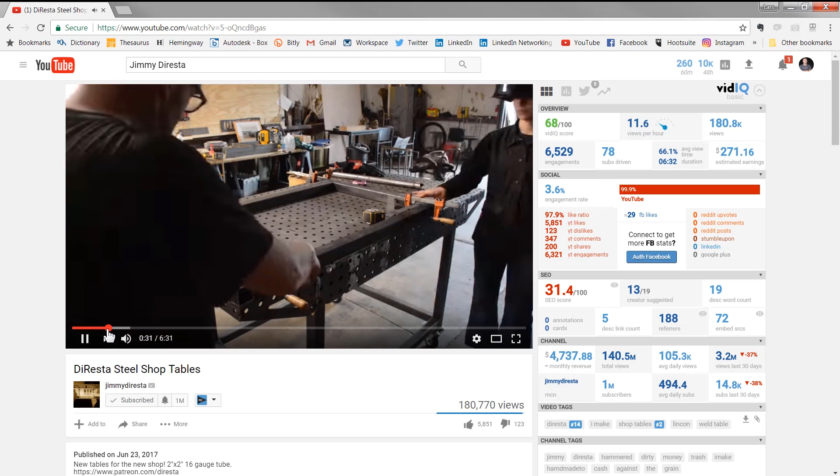Let's get to the modeling. So I'm going to do this with a couple of different techniques. Let's start out here by creating a new component, as this will be an assembly. So I'm going to click New Component, and I'm going to go ahead here and just name this one right off the bat. So Square Tubing.

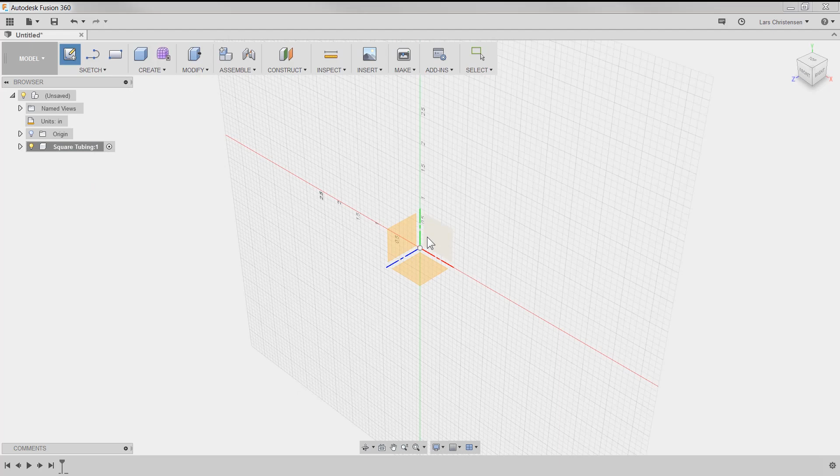And let's go in and start our first sketch. It doesn't matter what plane I'm sketching on. I'm going to hit the S key on my keyboard for my sketch toolbar, and I have the center rectangle right here. I'm going to go ahead and sketch up something that is 3 by 3 inches here. And then I'm going to hit O for offset. And I'm just going to offset this edge in here minus 0.25.

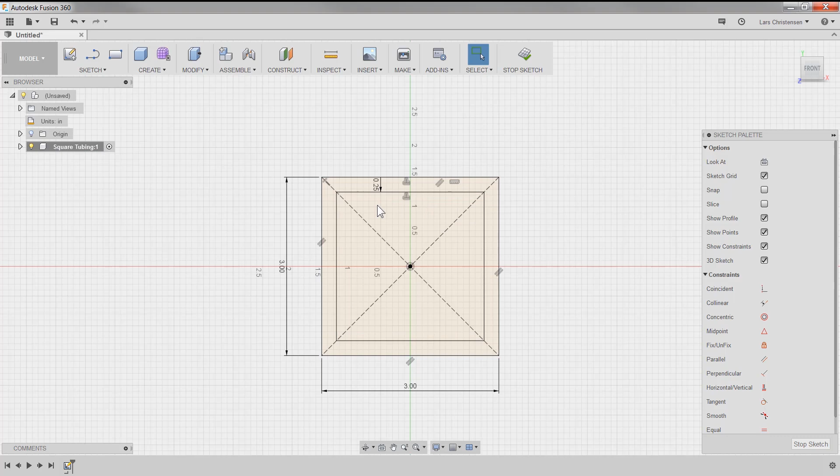Now that's really all I'm going to do with this square tubing within this sketch. I'm going to hit Q so we can do our press pull. And I'm going to make this one 8 feet long. So I'm actually going to type in 8 and then FT for feet. See that right inside of the distance dialog there. Hit OK. And we now have an 8 feet piece of square tubing.

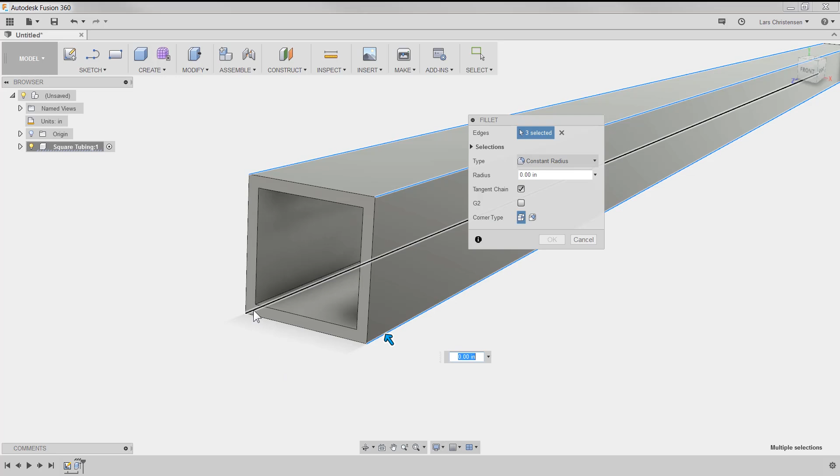Now there's going to be a couple of fillets on it here. So I'm going to hit F for fillet. And I'm just going to start out by selecting the outside edges, and you don't have to spin around to select the different edges. You can actually select right through here. And I'm going to make this 0.25, and then I'm going to do the same thing for the inside.

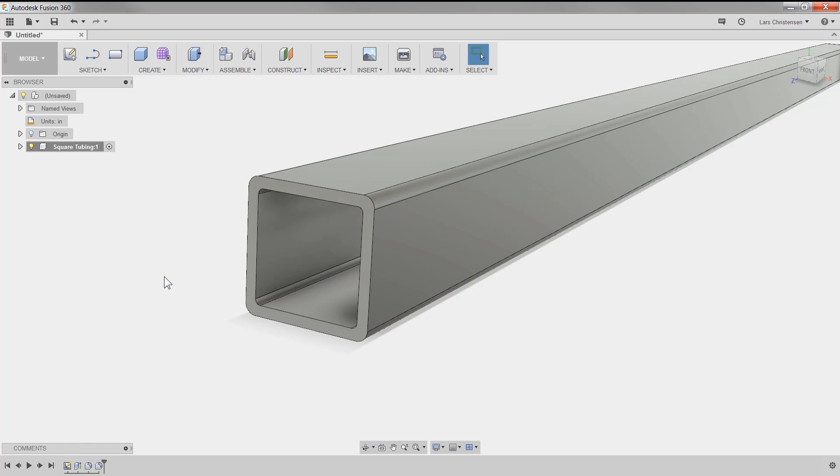So I'm going to right click and hit repeat fillet. That's just one way to get to a repeat command. And then I'm going to select the inside edges right here. And again, you can select right through the solids here. And I'm going to make it 0.15. Just like that. So this is my first piece of tubing. So this is a 3 by 3 by 8.

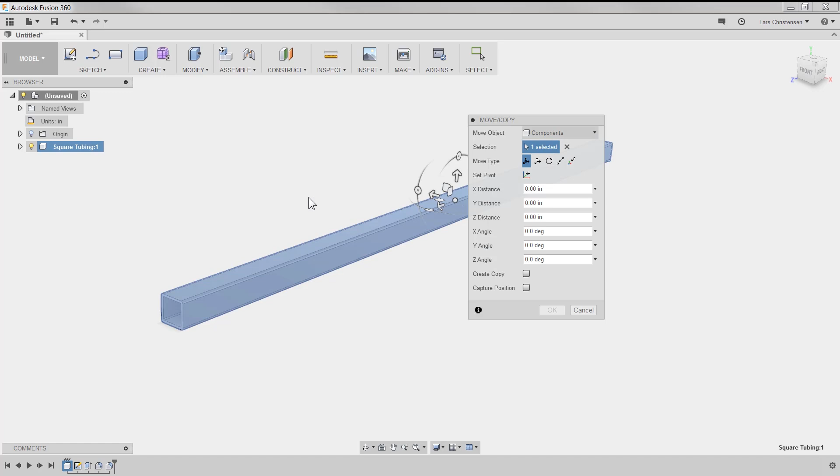Now I'm going to go up and make my top assembly here active. And then I'm going to do a right click and do a move copy command. Now in here, I can select different things. I'm going to select the component, right on our component here. And then I'm going to create a copy of that component.

That's going to create a second component over here in the tree. And I can now just drag that this way here. And I'm going to make the table 4 feet wide and hit enter. So now what we have here is 2 square tubings, but they are copies of one another.

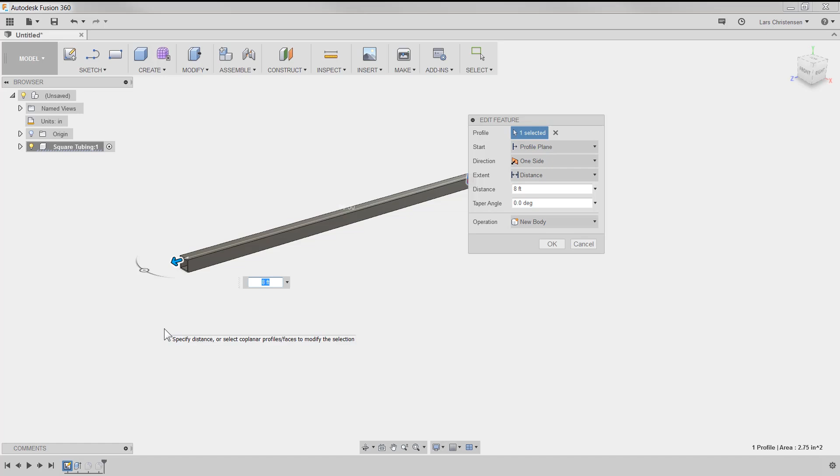That means that if I go into our first tubing, and if I, for example, change the extrusion from 8 to 6 feet, you will see that it's going to be reflected on both of them. This is now a copy of this one. But it's fine. It's just good to know that that is how the move copy tool works. Let's go back and make that one back to 8 again.

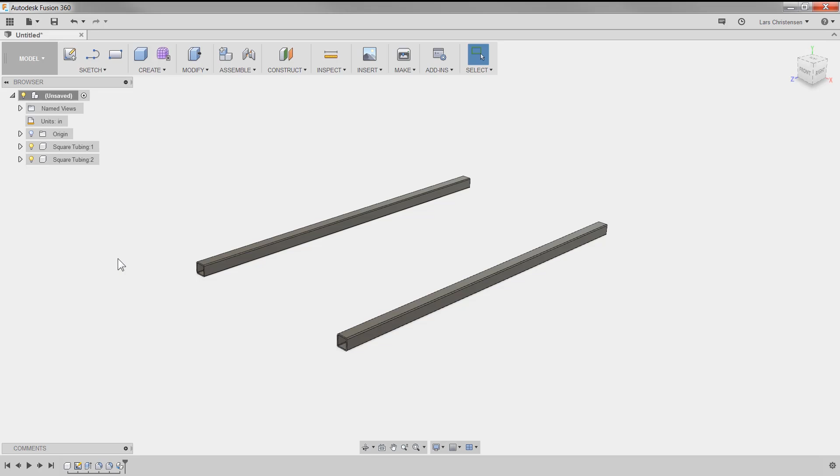Now we're going to go ahead and make the end piece here. But the end piece, of course, is going to be shorter than the original 8. So now we actually need to break a copy to be able to do that. And the way we can do that is if I go up on our first square tubing again, and I right click, I can do a copy.

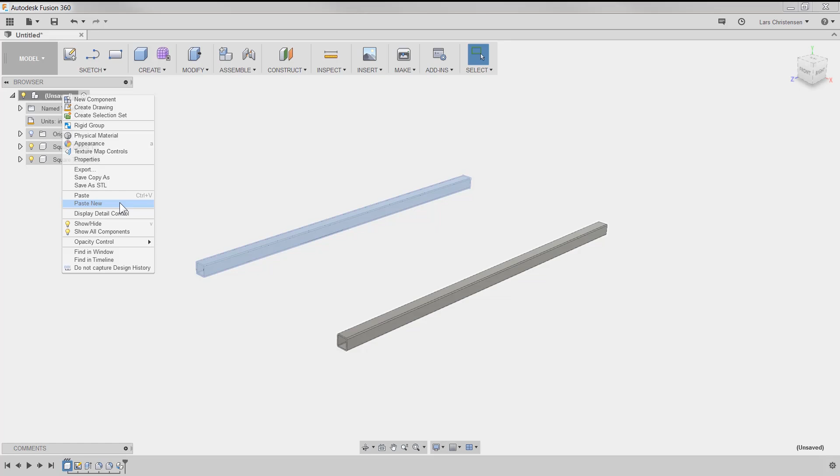And then by having the top component here active, and if I right click on that now, I can either do a paste, that will just be a copy like the one we just created for the second half of the length. But if I do a paste new, this will actually be a broken copy. So they are not associated, they're not linked together. So I'm going to click on that.

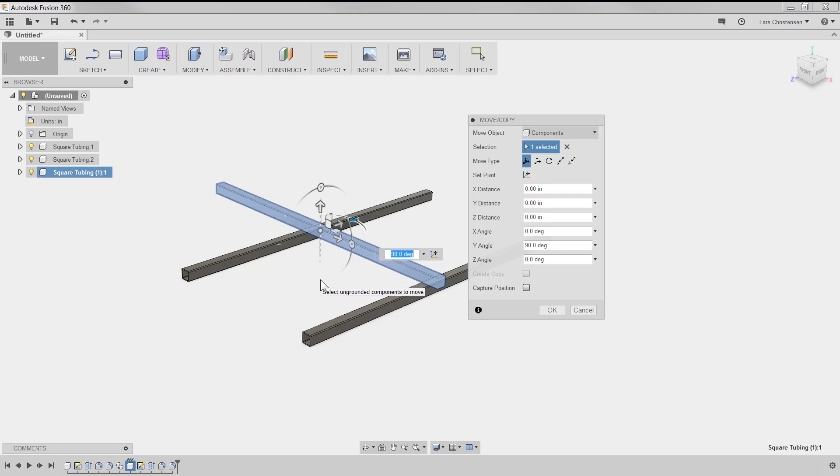And you will actually see that I get what was called kind of like a free move as soon as I do that, as soon as I place that here. And what I'm going to do is I'm actually going to rotate it 90 degrees. I'm just going to hit the little handle here, rotate it 90 degrees. And then I'm going to go over and select point to point.

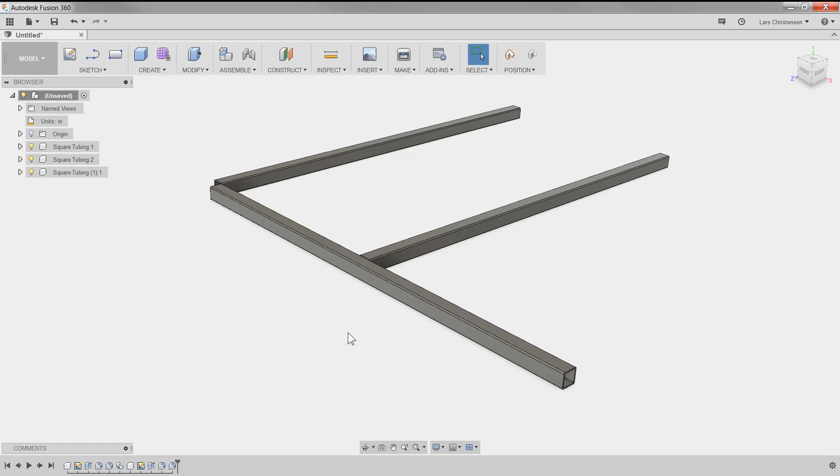I can actually go over on our edge here and I can select a point that I can now align this component up with right there. And now when I hit OK, you will see that I got now the third component in here that is not linked, but of course it is still too long. So I can actually go in and activate that, and I can now make that shorter, and that will be independent from the other one.

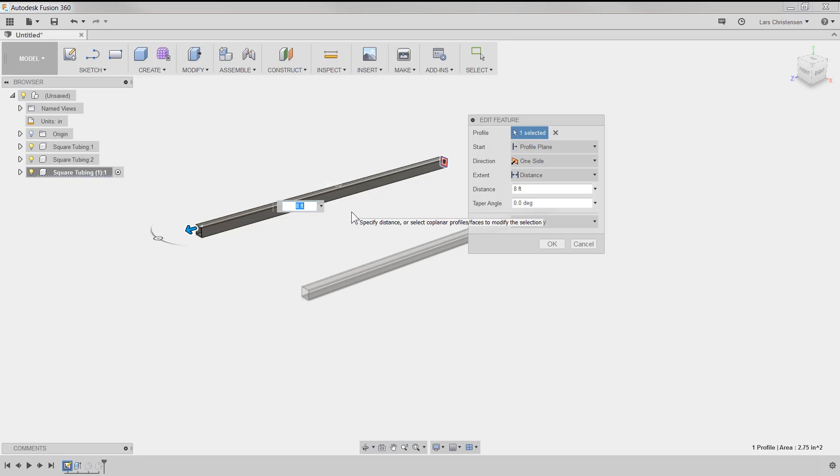Now, one thing you will just notice here when I make it shorter is that it actually on the screen jumps back to where it originally was when this happened. So that's one of the things to be aware of, that because we're going back in history, that will also affect that. I'm going to make it 45 inches long and hit OK. And if I go up and make our main assembly active, you will now see that I got that to the right length.

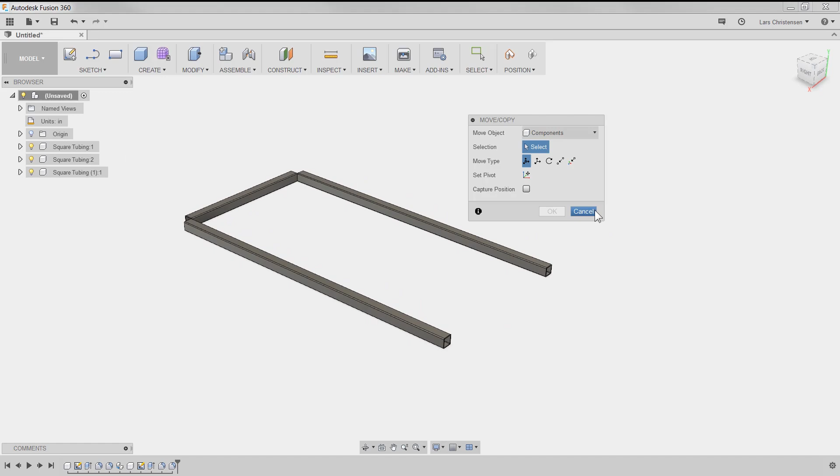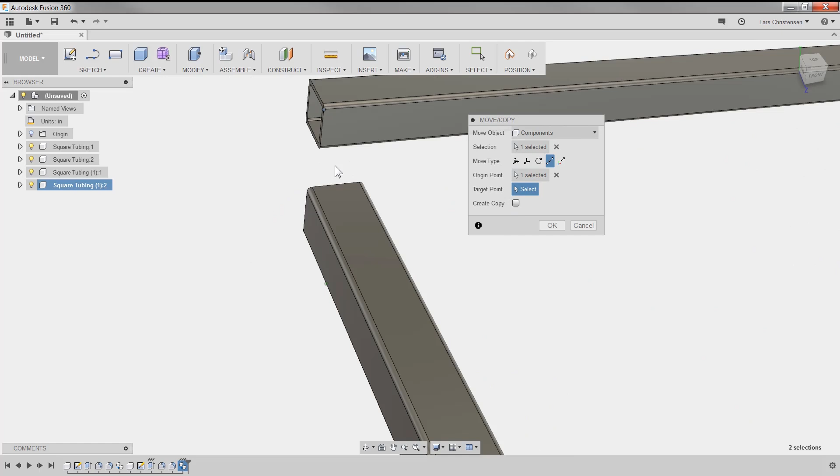Now I can go ahead and make a copy of this one. So I can do what we did before. I can right click and with this component selected, I can select create a copy, because that is what this is going to be. And sometimes I actually like to drag it out a little bit first before I go back into the point to point. It just gives me a chance to make sure that I select the copy, and I can select a point here and a point here. And when I hit OK, we now have the fourth component in here.

So as this is created right here, this is our original one, and this was a copy of that one. Then we broke by doing a paste new the second one that we now have made a copy of there. What that means is that if we ever change the length of the first component, then everything will update along with it. This is one of the nice things about parametric design.

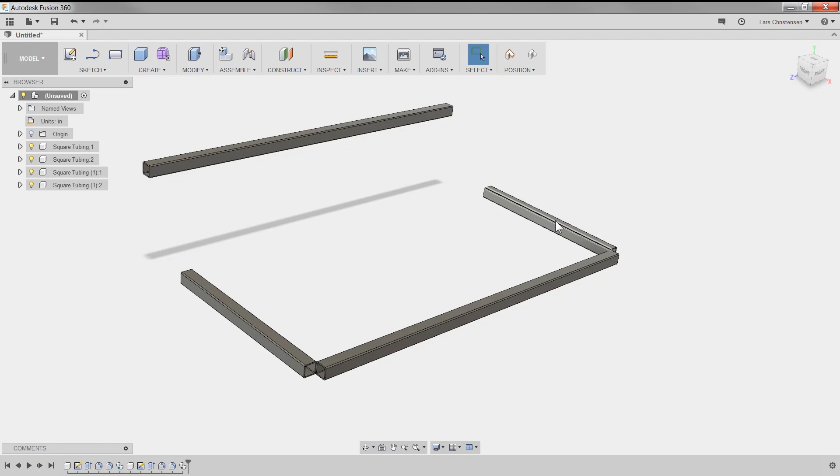Now with this put together here, one of the things to be aware of is that right now everything in here actually still floats around. Each component has not been tied down to one another. Let me just hit Ctrl+Z to go back to where we were. So in a CAD system like Fusion 360, we now need to, like Jimmy Diresta does, weld these together. So the first thing we got to do is nail one of them into space. We're going to go up here on the first one, right click, and I'm going to ground it. You get a little thumbtack. That means that this component is grounded in space.

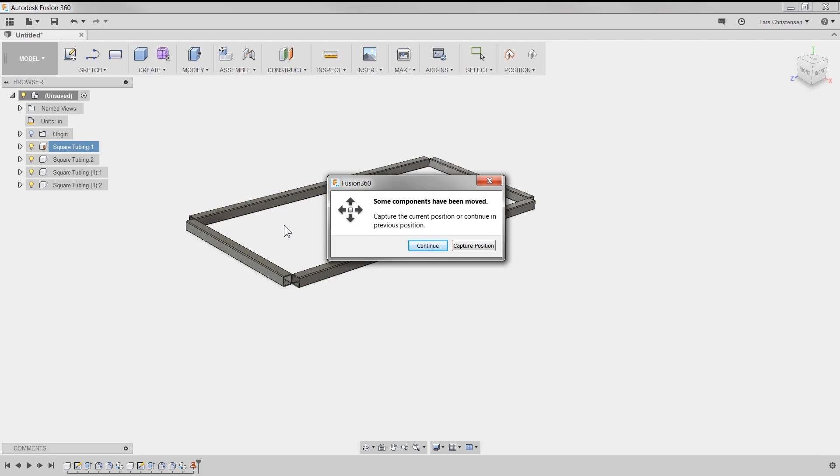And then I actually have a very nice function in here called rigid group. And I can now go in and select the remaining components in here, hit OK, and now everything is not moving anymore. Everything is in place.

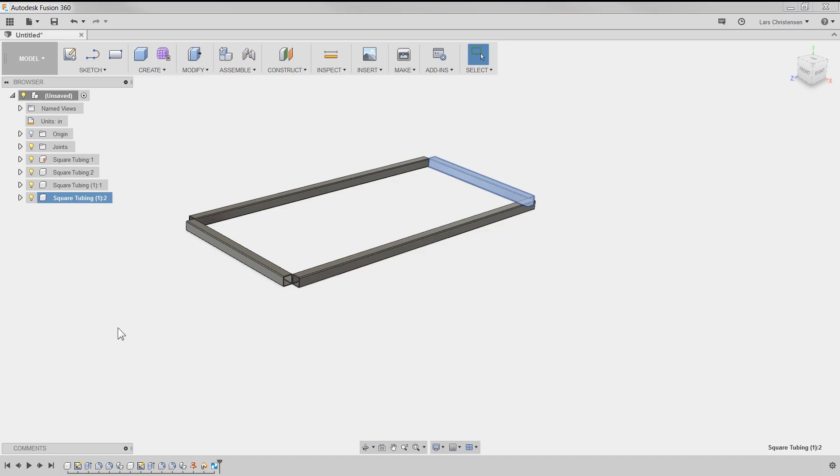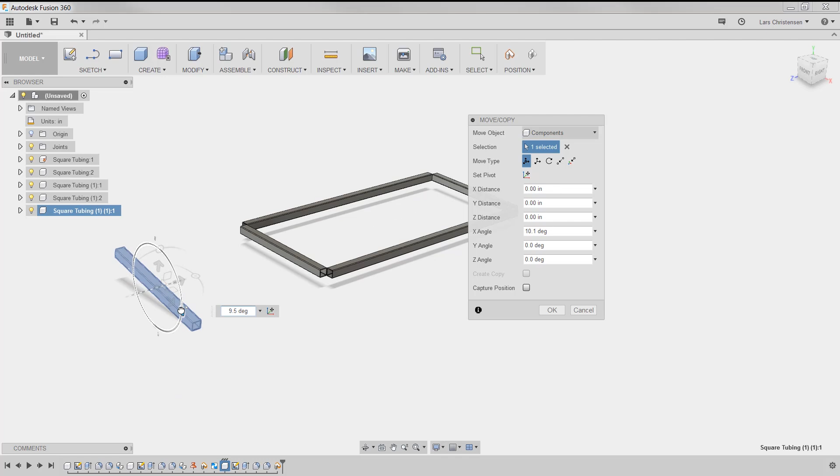So at this point, I am ready to put some legs on this component, and I'm just gonna use the same technique as I used before, where I right click and do a copy, and then I go up on the top component and do a paste new. Now this component, I'm just gonna move it out of the way a little bit like this. And now I'm gonna rotate it up, because it is going to be the leg. So I can rotate it just like that, and I can now place it in whatever location I want.

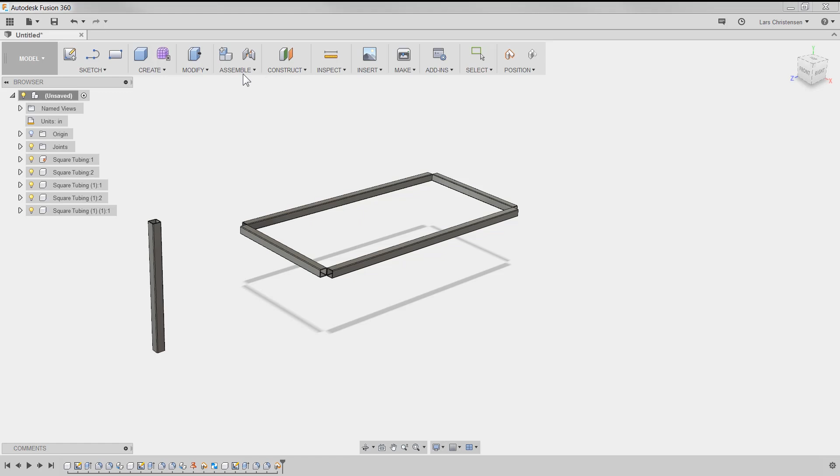But there's another way that I can place things in here. So I'm just gonna hit OK to let it sit out in space. And that is using joints. And it's just as perfect to use joints for this as it is to use the move copy. So I'm going to go over here and select this edge right here.

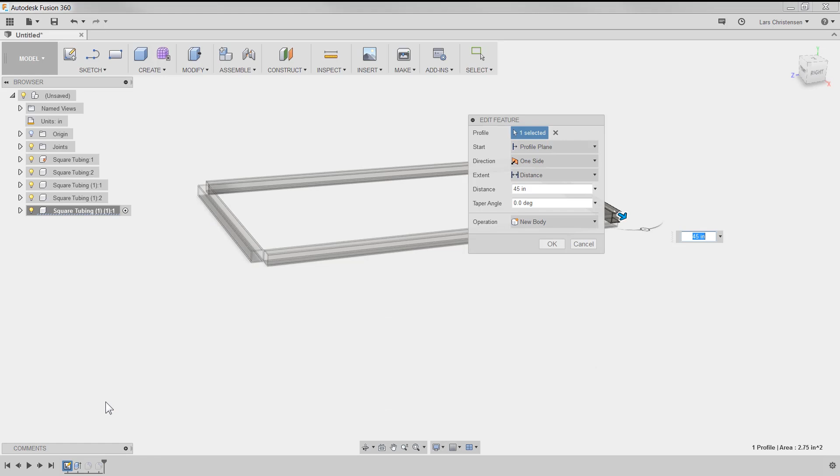And I am going to find the edge where that's going to be over there. And our leg will now be in place right there. Now this leg is a little bit longer than I actually want, so I'm going to go and make that active. Go into our extrusion here, hit edit, and you'll see again everything falls back to where it was before. I'm going to do 36 inches for this leg, and that is the length I want for that leg.

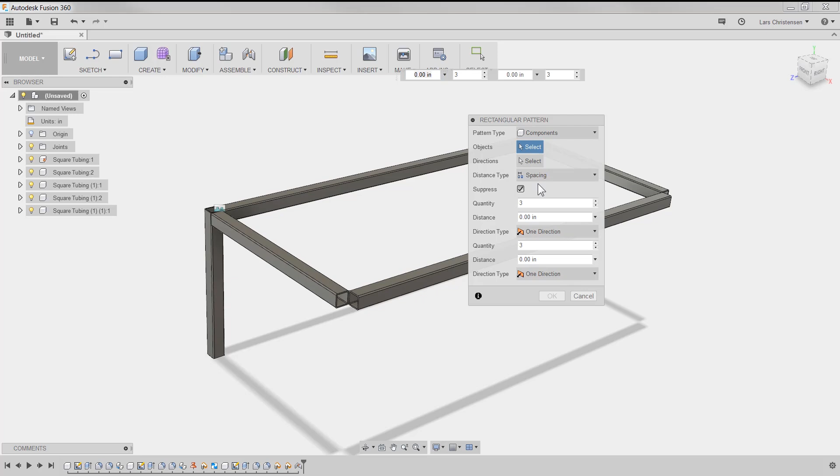Now, another thing we could do to move things around like this is we could also use the patterning command. So I'm going to go ahead and hit rectangular pattern, and you have different selections up here, and I'm going to select component, and I'm going to select our leg. And when you do that, we can select a direction. So I'm going to select one of the edges, and immediately it gives me arrows,

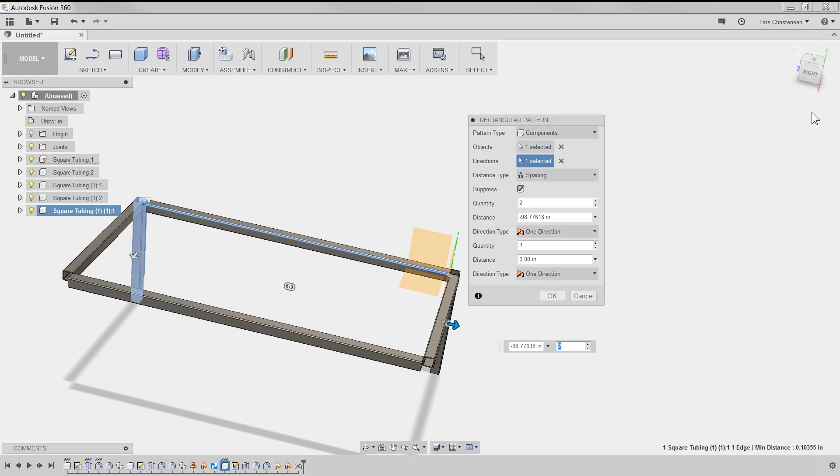and I can start moving things down here. Now you see the default's 3, and that's the total quantity. I actually only want 2, like this here. And I have it on spacing, and now we can move it down here. And I can actually cheat. I know it's 99 inches, but we can zoom in here, and we can see that minus 99 is the length I need here for this here.

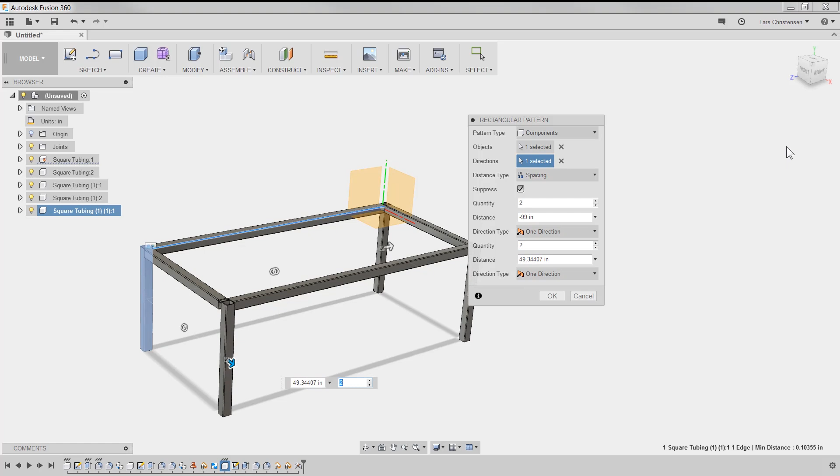But there's actually also 2 legs over here, right? So we can also grab the arrow here, and we can do the same thing by going 2, and then we just gotta place this in the right location. Zoom in here, and it looks like 49 is the right number for that. Hit OK. And we now have placed the 4 legs.

Now, just like we used the rigid group and the other ones, you will actually see that these legs will move also, even though they are patterns. So I'm going to go up and do another rigid group, and I select these 4 legs. Now, when I hit OK here, you will now see that we have a rigid group, and these 4 legs are now in place.

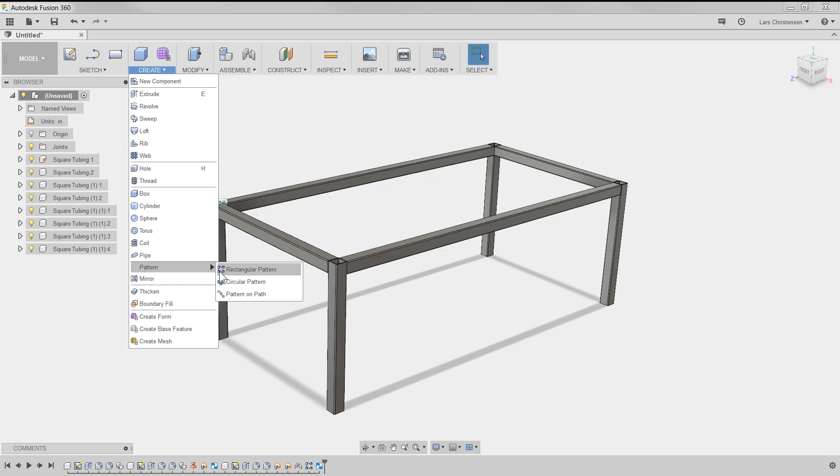With that, I'll probably just continue with our patterning command. So if I go up here and I do a patterning, I can select these 4 components here, and I am going to select the direction this way here. And again, I only want 2. So I'm going to do 2, and I want it to be minus 25. Get that section down there and hit OK.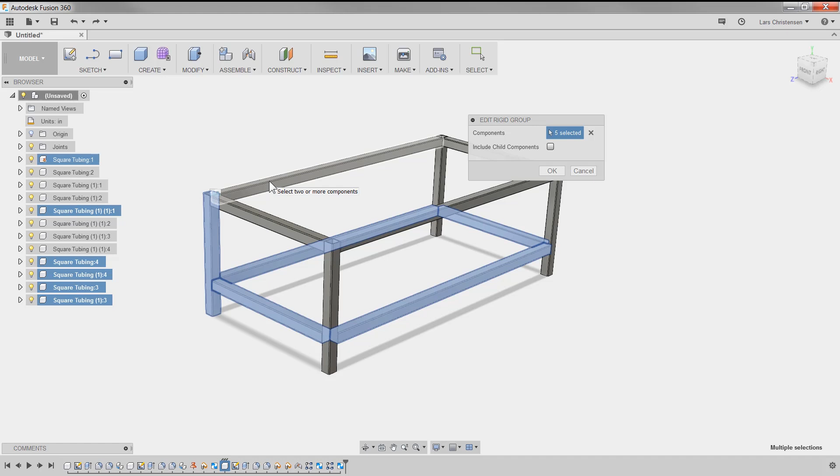Now again, as soon as we look at this, we can see that things are still floating in space. So we're going to go back to our trusted rigid group. And if I select the 4 elements here and hit OK, you will see that they move together. What I have to do is tie that rigid group in with one of the components that is attached to the original. And we had that this component here is joined into our original component. Hit OK, and now you will see that everything is back in place.

Now, Jimmy Diresta also had a center support. I'm going to do mine a little bit different than his, but again, I can use the exact same commands as you have already seen me use. So I'm going to do a right click, and I'm going to do a move, and I'm just going to select this component here. This time I'm going to use the free move, and I want it to be a copy, of course.

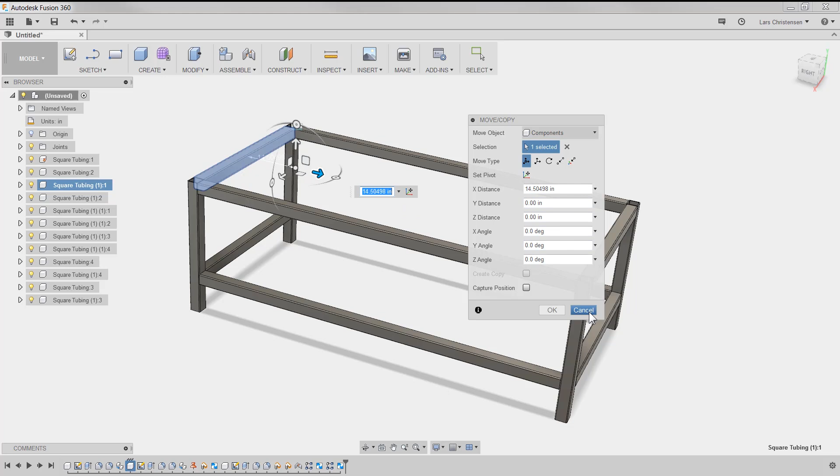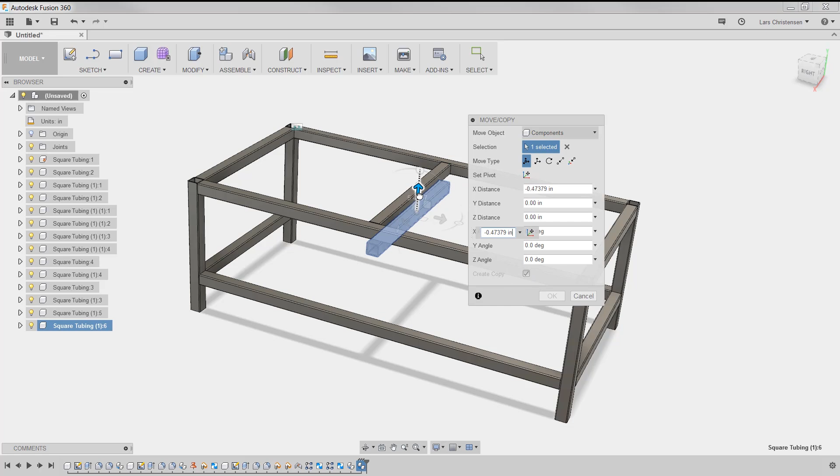Select this component. It's going to be a copy, and I know that this is going to be half of the length, which in our case is 4 feet. What? I can't do math? Subtract 1.5. I can click OK to that, and I can repeat the move command. I can select that component I just moved down here. I can create another copy of that. We just move that down, and that was minus 25.

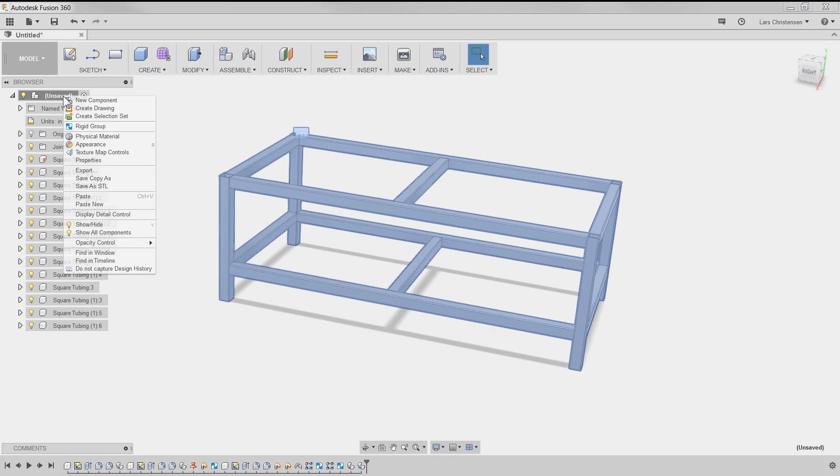Now I just need a little piece that goes between here. It's going to be 22 because we're going to subtract the 3-inch square tubing. So I'm just going to select one of them here, right click and do a copy, and go up on the top here, right click and do a paste new, and I now have that component moved out of the way here that I can now work with. So I'm going to go into that one, make that active, and go into the length here.

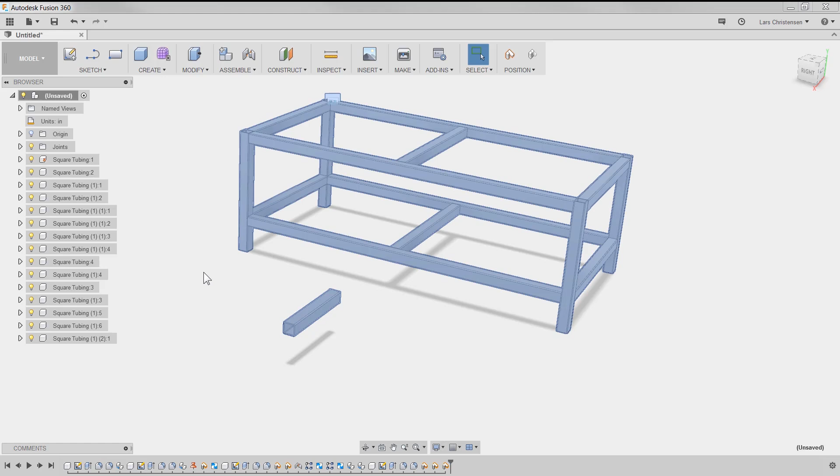And like I said, it's going to be 22 long. Now to place this one here, I am definitely going to use the joint command, capture position. You'll see me doing that all the time.

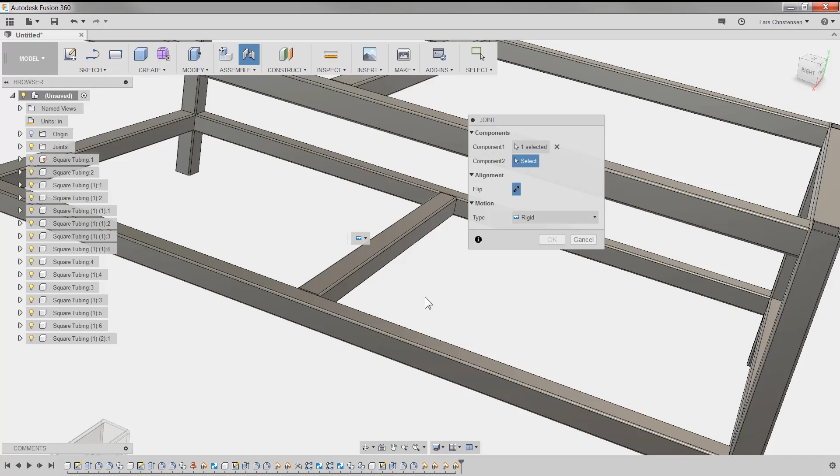Now here's a neat way to do this, because look at this. When I come over here, you'll actually see when I hover over that it gives me the center point of the tubing. And if I hold down Control or Command, I can actually hover over and I can grab that center right there. That means if I go over on our other square tubing, I can select the center of that one, and I will place my centerpiece right between there.

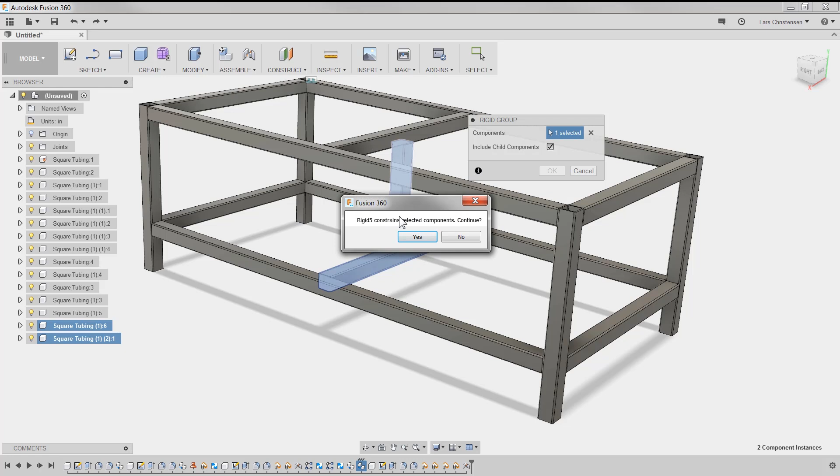Now, of course, these components are also still moving around, so we will need to do another rigid group. So like this, and it gives me a warning here that there is a joint in this selection, and just asks me if I want to continue. I'm going to say yes, and I'm going to select one of the bars, probably the first square tubing we selected, and add that one into that. And that's going to give us the entire metal framing for this.

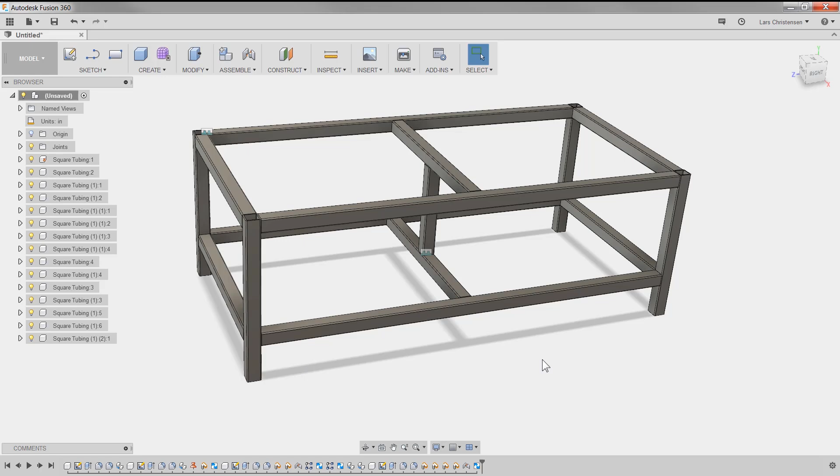Now, the last thing we've got to do is put a piece of material on top of this. So I'm going to create a new component, and that is going to be the top of the surface. And I'm going to create a sketch. Now this sketch I'm going to create, of course, right on top of the part here, because that's where you put it. And actually, when I'm doing something like this, I would probably just sketch a rectangle that is too big,

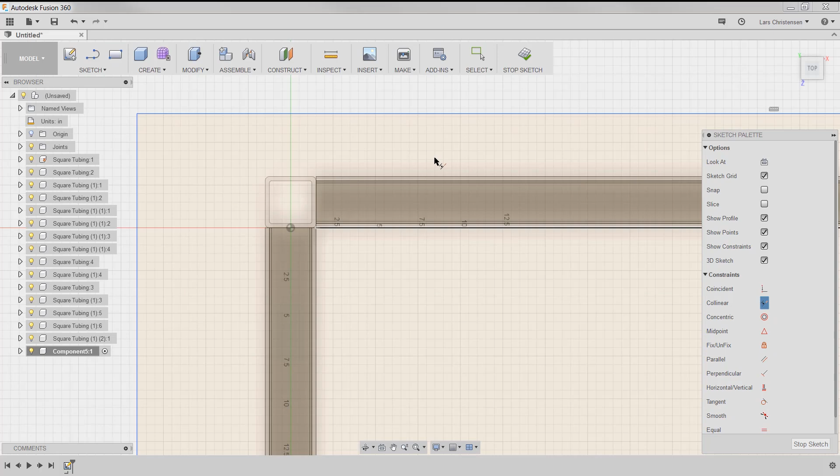and then I will use the collinear relationship between, I'm still on axis, collinear between here to here, here to here, here to here, and the last one in here. So that way I have made sure that the tabletop is following along here.

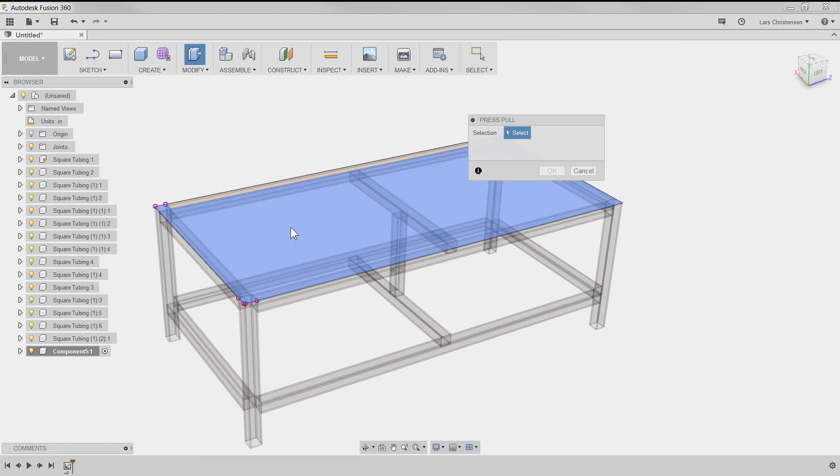And then I'm just going to go ahead and hit Q for press pull, and I can select our top surface here, and I'm going to make this 1 inch thick. So there is our tabletop. Now there's still a couple of things I want to do at this point.

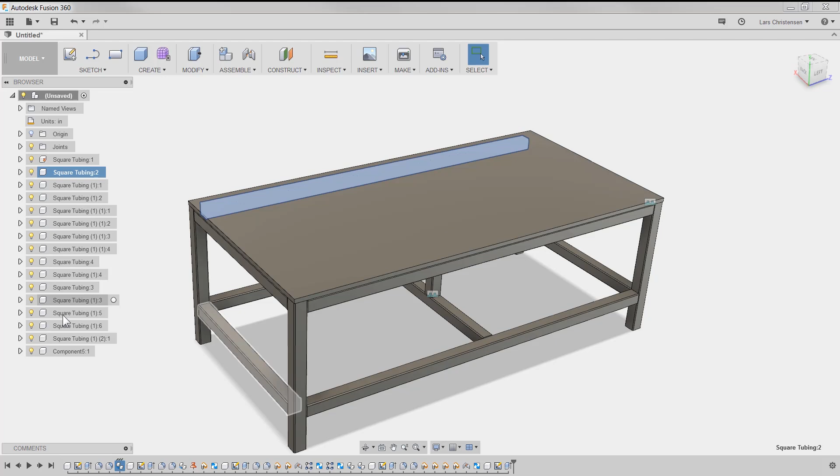One of the things I'm going to do is there are some naming things going on in here. So some of these components in here, when you're looking at them, you might want to name them as you're going along, just to make it easier for yourself. So for example, I can go down to this top here, and I could call this the table top, and you can name everything by slowly clicking on it.

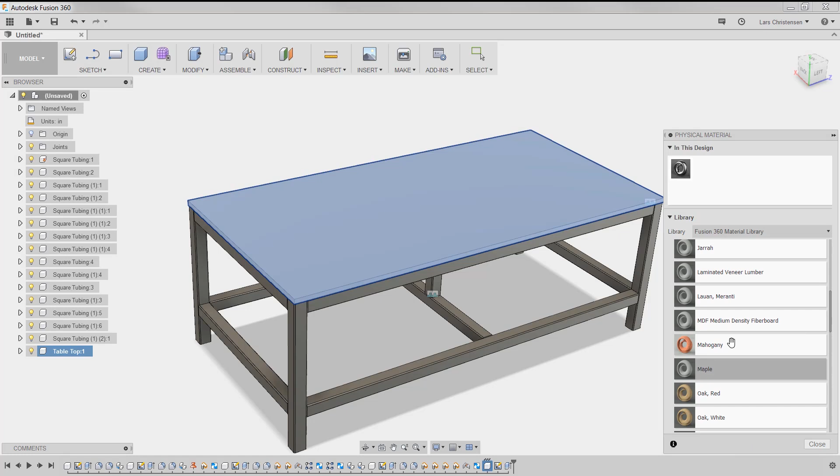Now another thing is that by default, Fusion 360 makes everything metal as a material. You can actually go and right click, and you get two options. You get one where you can do physical material. Physical material in here means if you're doing any kind of simulation or something like that, and you'll see there's all different kinds of materials in here. Somebody told me that this would be an MDF board that Jimmy Diresta used, so that's what I'm going to select. But you will see that I also have the option to go in here and change the appearance also.

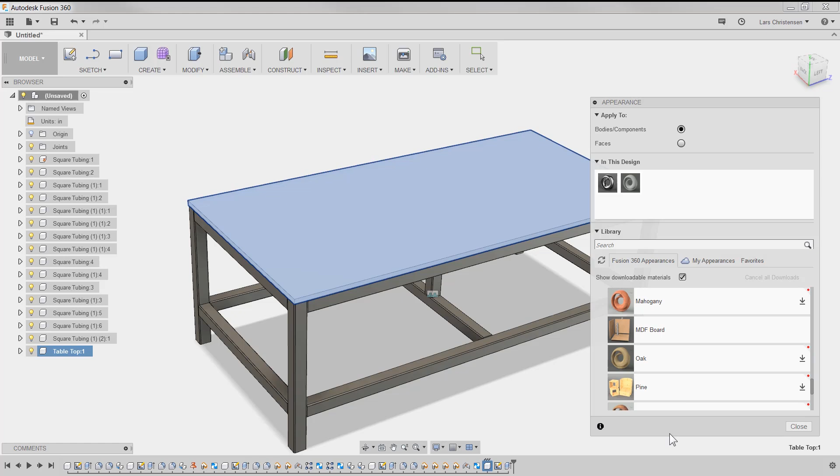And in here you will see that we have all different types of woods. A lot of them are ones that you can download. There is also unfinished in here. And you will see that I have an MDF board right here. You can download them with these small arrows, so I can move that over on the body right here. Also, you will see the joints are appearing in here, so I can turn those on and off, of course, with the lights over here.

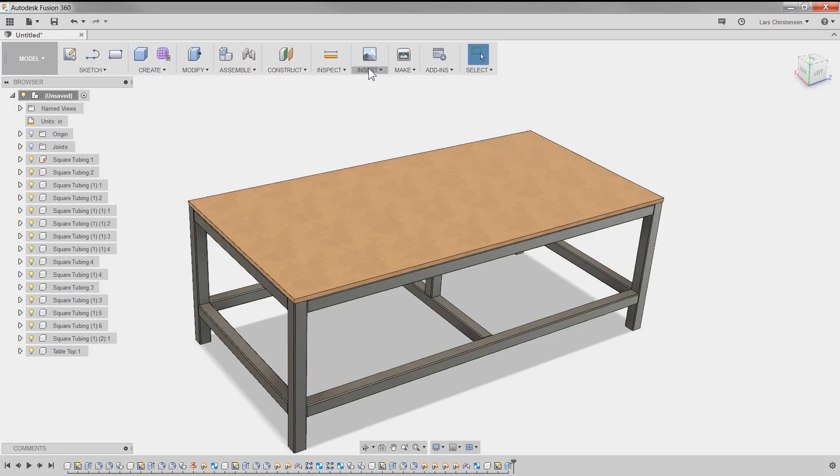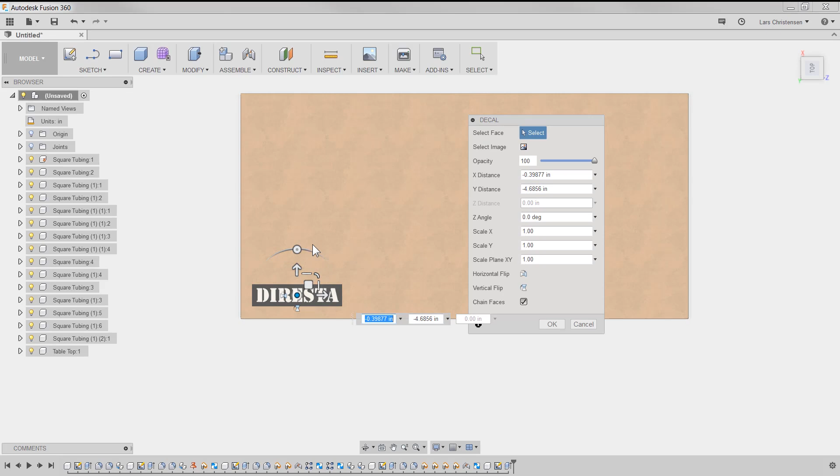And the last thing that I've got to add to this table is that in good Jimmy Diresta fashion, he spray paints his logo on. So let's go ahead and insert a decal and select an image. I have an image right out on my desktop. Select that, and I can select the face to place it on. Let's go on the top surface here, and I can now scale it up and down, move it, rotate it, whatever we want, and place that image there. And this kind of finishes how I modeled up that table.

That's it. I hope that you found this video helpful. A couple of different techniques on how to copy and paste components.